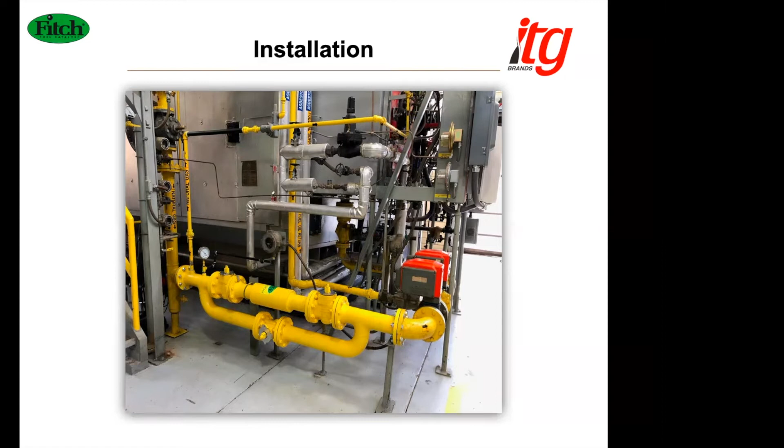After discussing the technology with Cristian, we made the decision to give it a try. We installed the catalyst in May of 2019. First, we ran it for about a week or two. Then we came back and made our tuning adjustments, mainly on the low end for excess air, or rather O2 percentages. When we tuned our boiler, we were able to reduce our O2 levels to the point that we could also reduce the fuel and burn cleanly. We were able to reduce our minimum load on that boiler to 8,000 pounds per hour.

So we went into this with a targeted approach. We had a goal we were trying to achieve. Our goal was to be able to use our most efficient boiler, the one we had made upgrades to by installing an economizer and thermocharger. We wanted to be able to use it on the weekend and get higher efficiencies.

Prior to installing the catalyst, on our low ends we were seeing efficiencies of 72 to 74%. Once we installed the catalyst and made the changes, we started seeing efficiencies in the 80 to 82% range on the low end. And then we saw higher efficiencies, as high as 87%. This is a 1969 boiler, so it has some age on it, and we're now able to see 88, 89% input-output efficiency.

We did just most recently replace the catalyst, and it lasted almost exactly 20,000 hours. What we started seeing was supply gas pressure drops where we weren't able to make capacity on the high end because of the gas pressure drops, and we also started seeing a reduction in efficiency. We changed it out, brought it back online, and apparently it has a burn-in period, because in 7 to 10 days we started seeing the efficiencies we had achieved before.

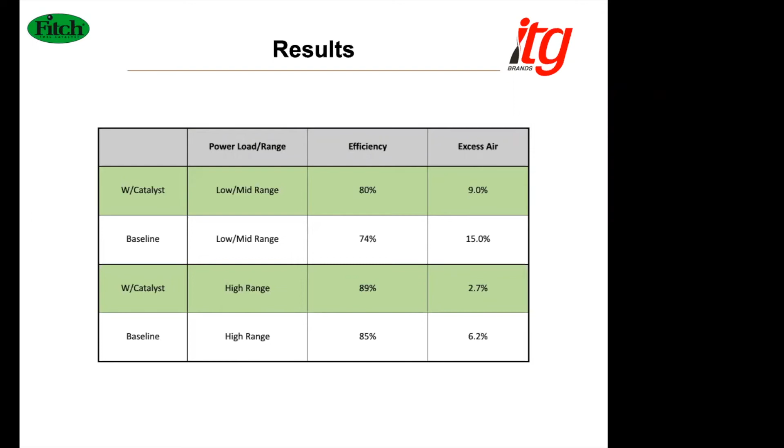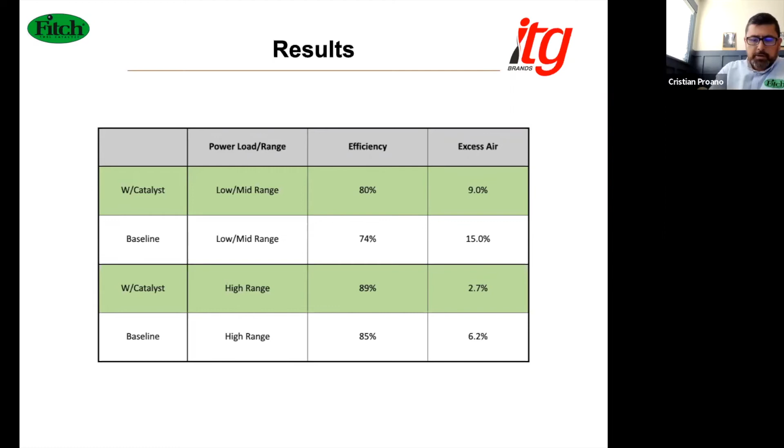I would love to give Petro the opportunity to share with us a little bit of his experience at the Altadis plant in Pennsylvania.

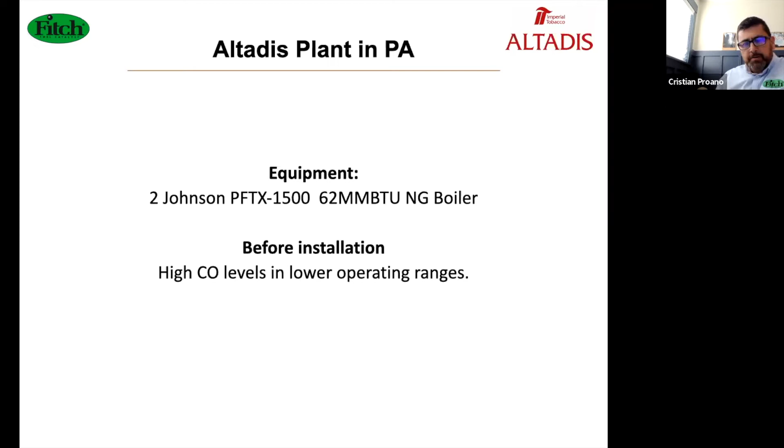Thank you, Cristian. As Cristian mentioned, I'm Petro, located in the Central Engineering Office in Germany. On one of our technology-related projects, we visited the ITG factory in Greensboro in 2020. It was around one year into operation of the Fitch Catalyst there.

Fern shared with us the experience, certain achievements, and measurements they had so far. I'm in charge of efficiency increase and energy consumption reduction projects worldwide, so I took it into account and shared this information within the group.

The first step and most close interest was taken by another one of our facilities in the US, in Pennsylvania. They had a similar situation to what Fern mentioned, operating over weekends and at lower production.

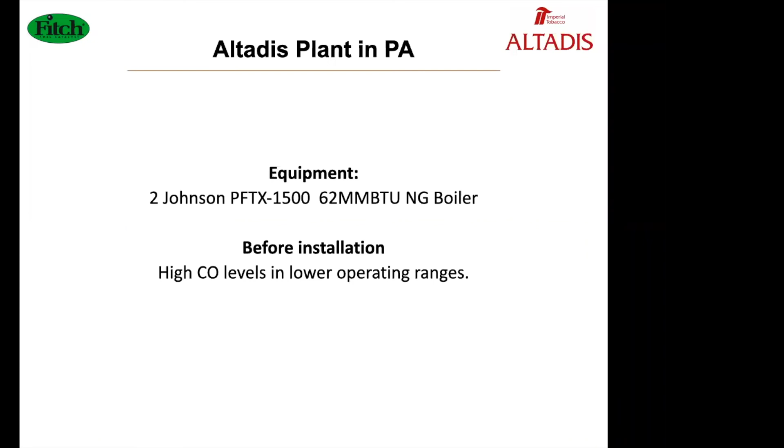So now they can go below 15,000, into the range of 8,000 to 9,000 pounds per hour.

For energy savings, we normally take a one-year period to judge and compare operations with and without, and then confirm certain figures. But for the moment, we account for 1.52% savings on gas.

We also consider for the future our facilities in Africa and Asia, where LPG, diesel, or heavy oil are used, and we can consider Fitch solutions for different fuels. This is also in our plans.

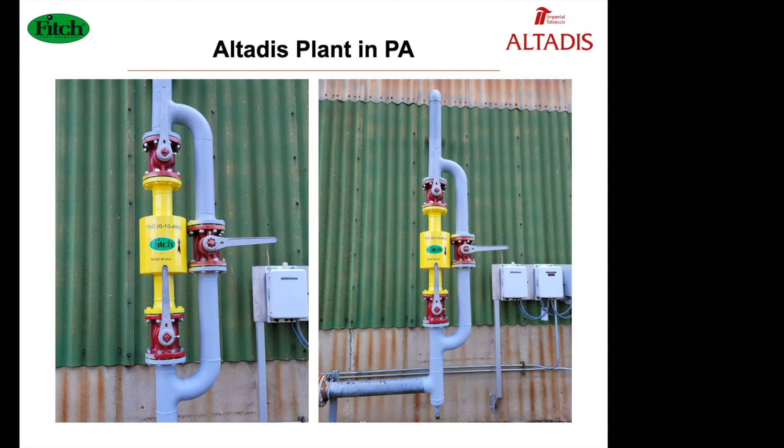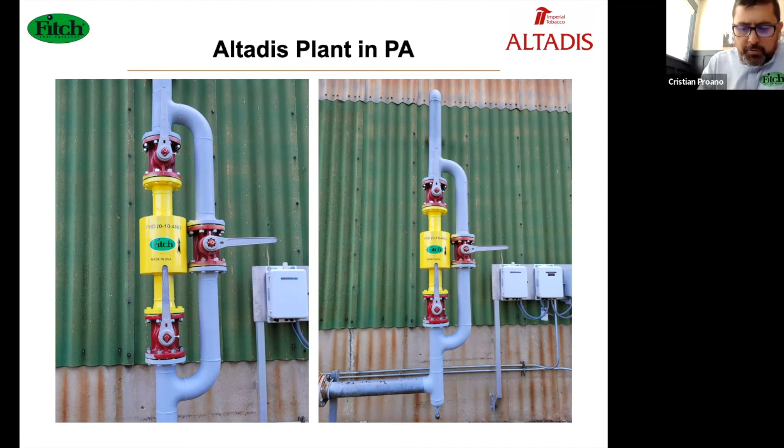Vern, Petro, we really appreciate your feedback, and just to validate, as you have heard, the results are quite interesting. When you look at return on investment, this, for example, is a model done for a US group here in the United States.

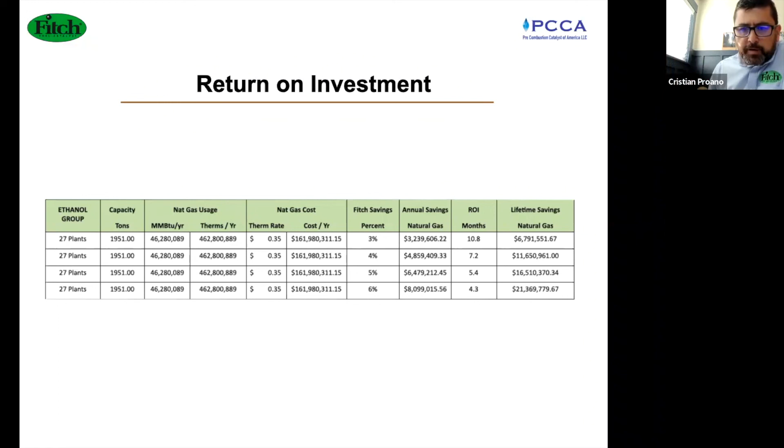So you have a price of natural gas that may differ depending on where you are based, but in most cases we try to stay within a 12-month ROI period so you can have a good amount of time left for savings. And to finish, there are external factors playing into play at this current time. Number one, we have rising costs of fossil fuels.

This is inevitable, they're just going up, and this certainly affects the bottom line in your operation. The other factor is increasing pressure to reduce your greenhouse footprint, either through new carbon reduction strategies via corporations or policies established by governments requiring companies to reduce their carbon emissions.

In any case, we would love to try to help and see if there's an opportunity for us to assist the company in improving efficiency. There are incentives provided at the state and federal level, and perhaps if this is tracked, it could also give opportunity to access carbon credits. So that is all from our end.